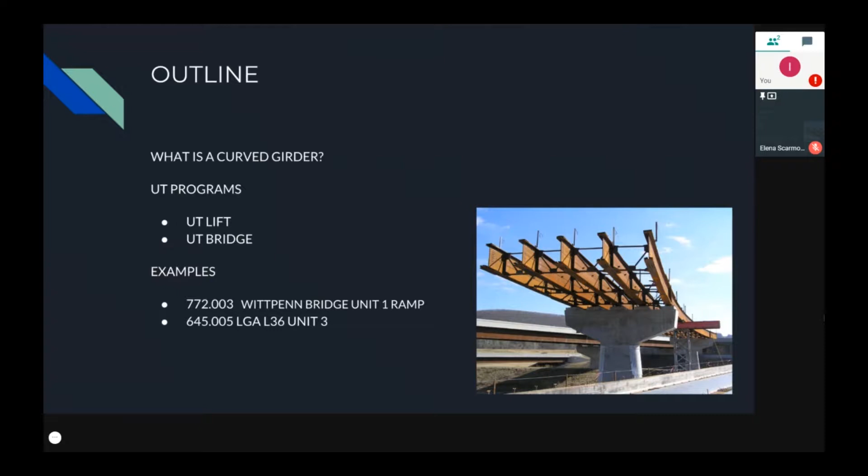First, what is a curved girder? So, the NHI specs consider when you have a central angle of your girder less than 3 degrees, you don't have to consider it curved, which is helpful because there's a lot of extra work that goes into analyzing curved girders. There's also an AASHTO spec that considers it 0.06 radians, which is a little more than 3 degrees, so you have a little more wiggle room.

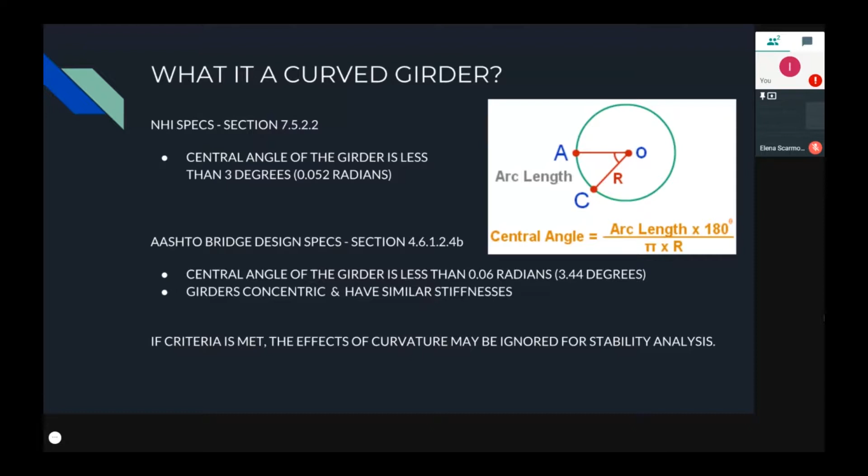But the central angle of your girder is the arc length of your girder divided by your radius. So normally you have to have a very large radius in order for it to be considered a straight girder, and I haven't come across this in any of the curved girder jobs I've done, but I think other people have at Siefert. So if you meet this criteria of being less than 3 degrees, you don't have to consider its curvature, and you can analyze it as a straight girder as you normally would.

So how do curved girders behave differently? Their center of gravity is on the inside of the curve, which is something you don't have when you're analyzing straight girders. This can cause tricky rigging situations, and you really need to look at different spreader bar lengths and different rigging options when you're looking at curved girders. Here's an example of a curved girder being set with a crane. This is the Glacier Skywalk in Jasper National Park, Canada.

I almost went to this on vacation, but it was very rainy and snowy the day we were going to go, and we didn't end up going. But found some pictures online.

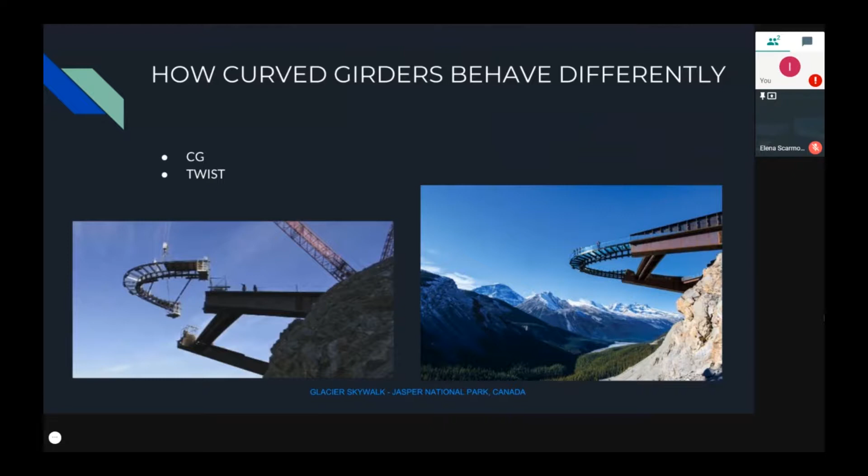Another aspect you want to look at is twist of your girder. So this is what can happen when you have curved girders and you pick them up. They can twist a lot. The twist is caused by the center of gravity being inside your radius of curvature and your pick locations not in an ideal location.

Your girder can be considered stable while still rotating, so it's something that we really need to look at when we're giving our packages to the clients, that they're not just stable and they have a minimal twist. So when you're making your girder connections to splice plates, they're easier to make if they have less twist.

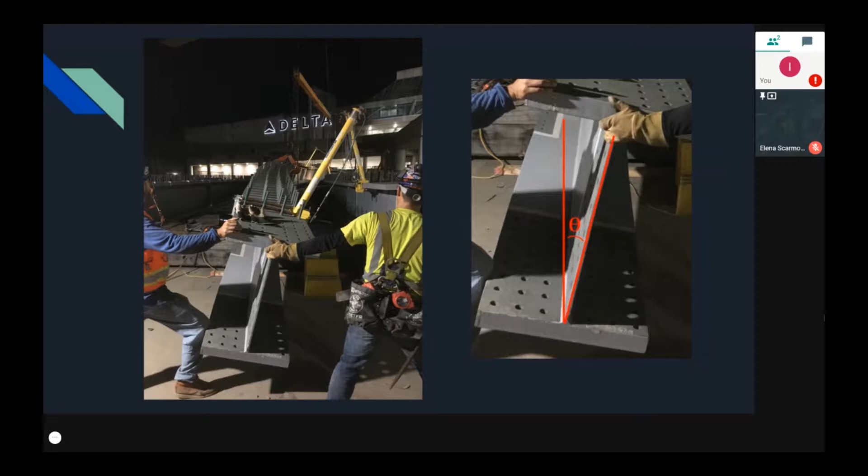So one of the UT programs we use to look at curved girders is UT Lift. UT stands for the University of Texas, which is where it was made, and it is an Excel template that looks at curved girders on the hook. It's a very handy program, and it's very user-friendly, and it has a lot of different functions. It can tell you the center of gravity of your girder, which is nice. It gives you your ideal lift location.

The image in the top right corner shows your ideal lift locations where your line of support runs through your center of gravity. This is nice because you have zero twist in your girder when your line of support runs through your pick points. And your reactions will be equal at both pick points. The image in the bottom right corner shows when you can use any length spreader bar in UT Lift. So when you use any length spreader bar, your center of gravity might not be located at the line of support, and you'll have an eccentricity, and this is where you get your twist from in your girder.

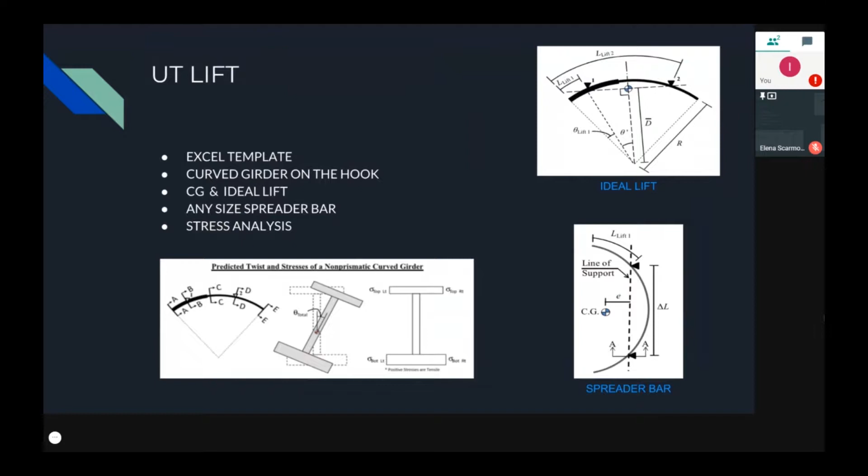UT Lift lets you put in any size spreader bar you want, and you can look at the different stresses along your girder and your twist. UT Lift looks at stresses in the top flange, right side and left side, and stresses in the bottom flange, right side and left side, at several points along your girder. The bottom image on the screen shows it taking 5 sections: at the beginning of the girder, at your first pick point, in the middle of your girder, at your second pick point, and at the end of your girder. So it looks at stresses throughout the girder, not just in one location. I'm going to pull up an example of a UT program.

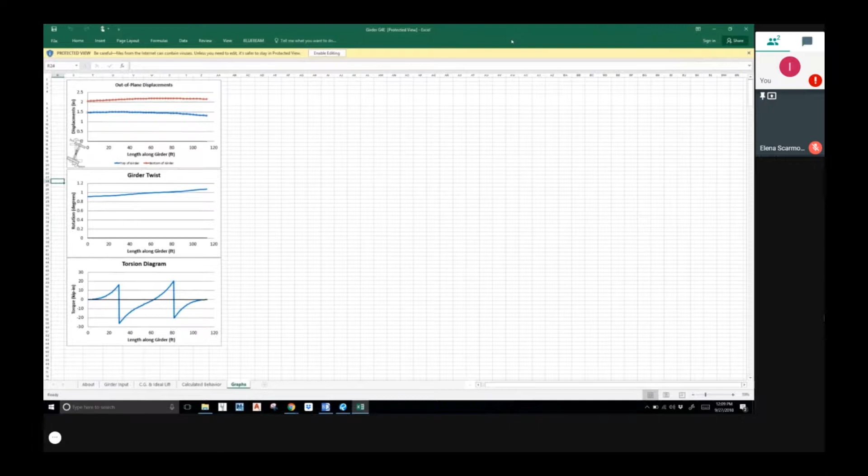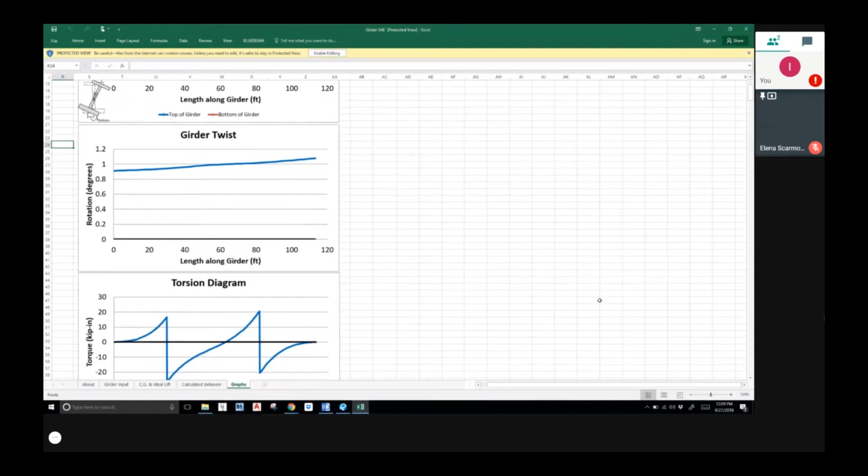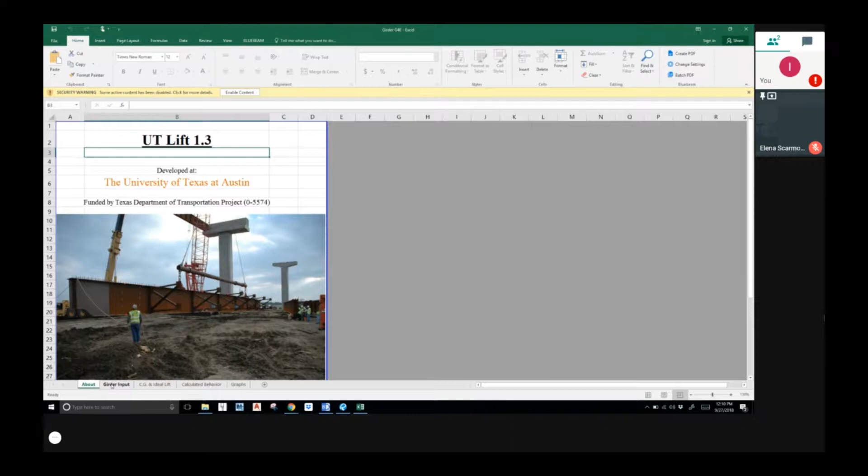So this is UT Lift. Whenever you open the program, you have to click on the icon that says Enable Editing to allow the program to run different stresses when you change the input. So this is the cover page. The University of Texas created the UT Lift program. This is version 1.3. They're always coming out with new versions and updates to it, which is very helpful, and you can find information online about it.

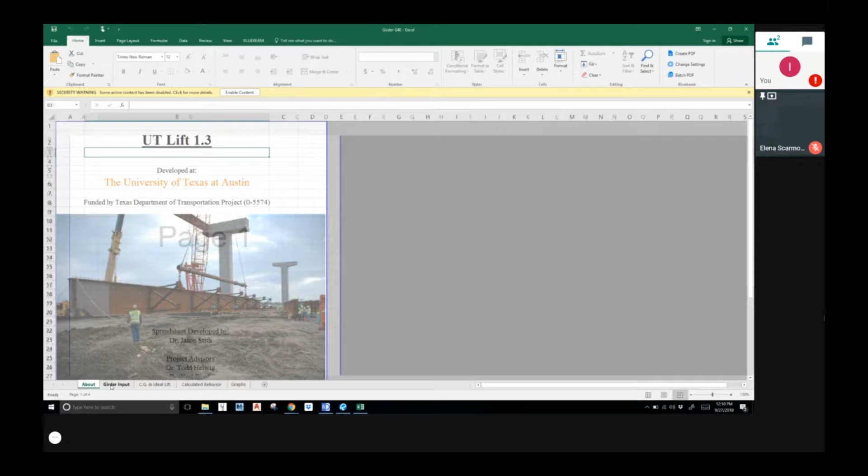Your first page is your input page. It's pretty straightforward, where all of your green boxes are your inputs and all of your blue boxes are your results. So title it, project name. This example is Unit 1 from the Whippin Bridge that I worked on with Kevin. I was looking at girder G4E.

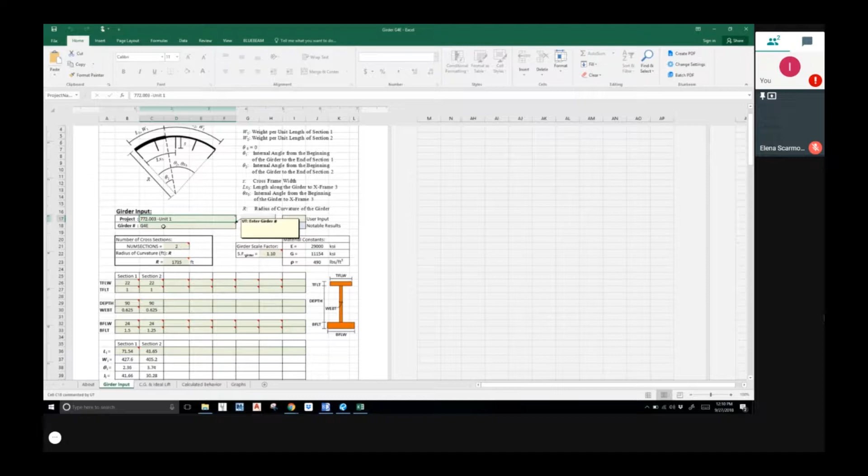You can input how many sections along your girder you have. So this is helpful when your girder is changing cross sections along it, or if you have 2 spliced girders that have different cross sections, different plate thicknesses, you can take that into account in UT Lift. So you input your section properties, top flange, your web, bottom flange, your length along each section, and your radius here.

On the bottom of the Input tab, you have your cross frame setup. UT Lift does a nice job of explaining all of its inputs. If you hover over the box, it'll tell you what you should enter. And it has a nice diagram on the bottom of your cross frame location. So this is the length along your curve to cross frame number 1. And your distance S is the length of the cross frame.

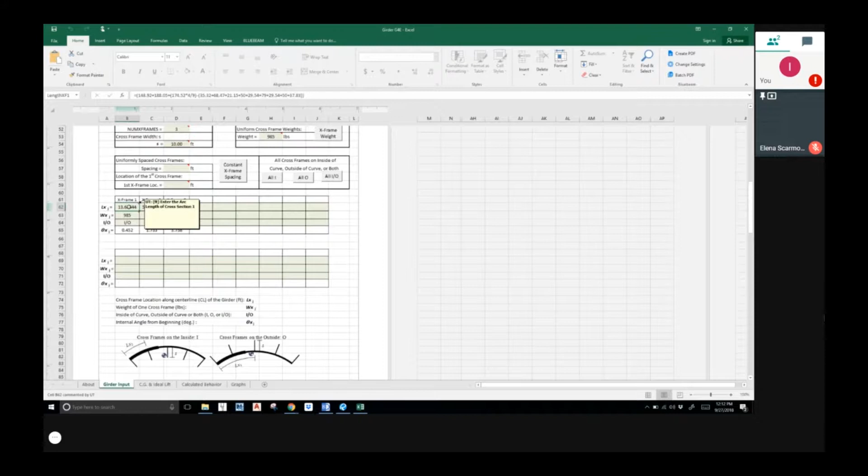So you can put cross frames on the inside of your curvature, the outside of your curvature, or both the inside and the outside, which is typically what we see when we're doing rigging and calling out our diagrams. So to input them, you can use the constant buttons up top if everything is spaced evenly and the same weight, where you can put in one weight and hit constant cross frame weight for all of them. If you have, let's say, 5 cross frames, it will pop out all of your same weights down here.

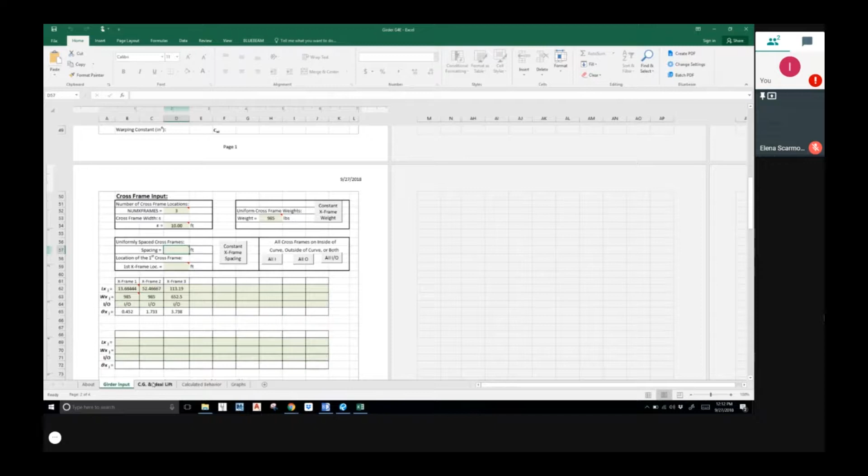And then you can choose your spacing, set it at 10 feet, and hit constant cross frame spacing, and it will automatically put in your length for you. In this case, I had different spacing in between my cross frames, so I did it manually. So after you've inputted all of your section properties and your cross frames, you can look at your outputs.

So the first output tab is your center of gravity and your ideal lift point. It tells me my total length and weight at the top, and then my distance along the curve to the center of gravity. It also gives me the offset, which is the distance from the center of gravity to the center line of the girder.

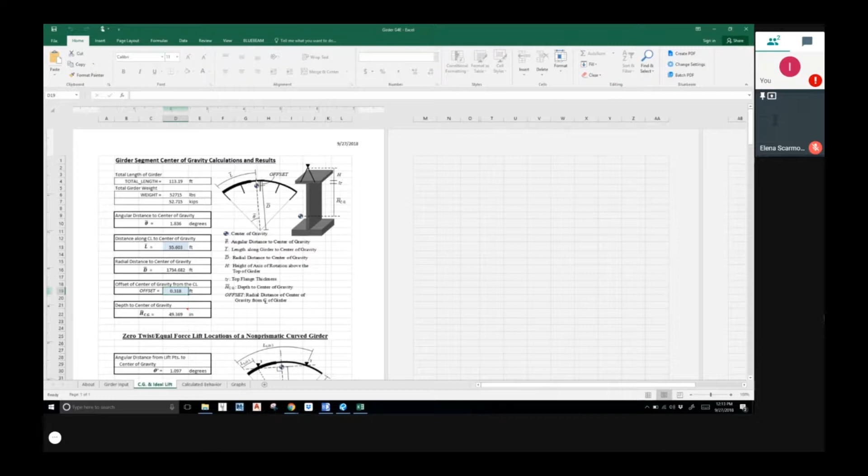On the bottom, it gives you your ideal lift points. So this is what we would use if we had a spreader bar length that you can make any size, and you want to lift your girder with no twist, which is the ideal way to lift a curved girder. Then you would use an 88.8 foot, a 66.4 foot spreader bar, and it gives you your location along the curve to your lift point 1 and your spreader bar length.

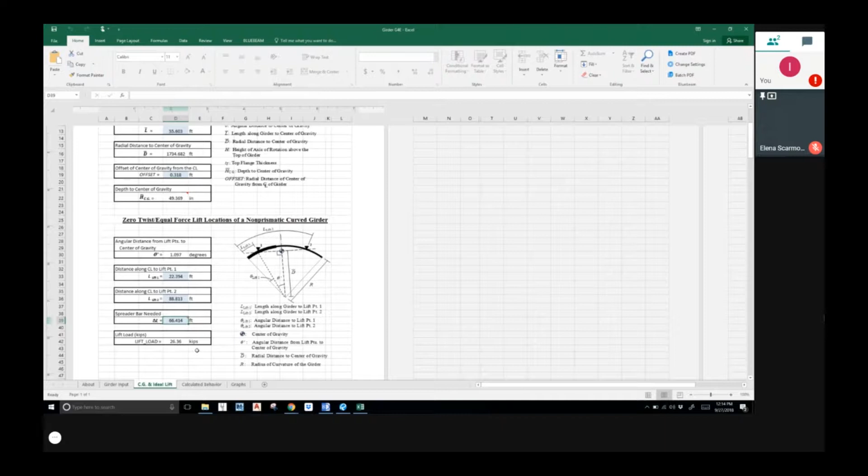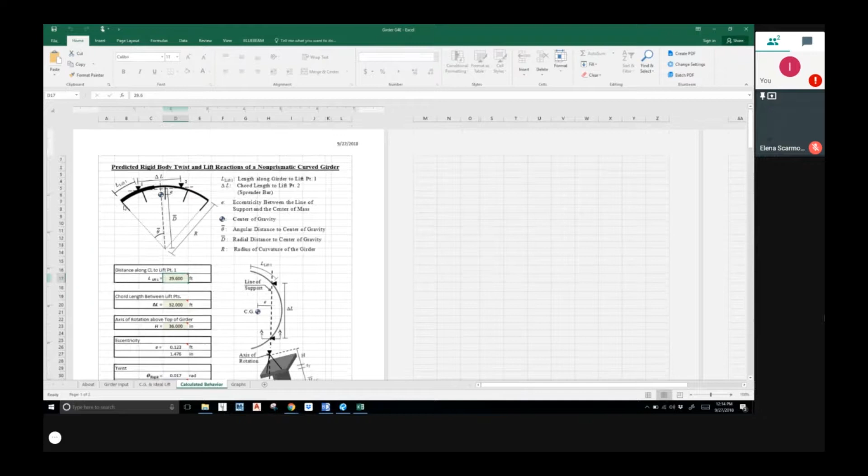So in this case, we were using a specific length spreader bar. We can't use a 66-foot spreader bar. We go to the next tab. Up top, you can input your location along the curve to your first lifting point, and then your spreader bar length.

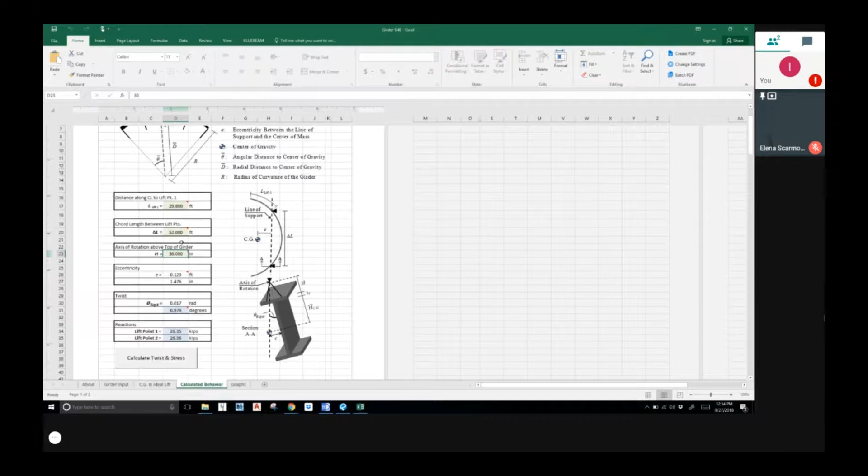The height H is the axis of rotation. We were using the height of the beam clamps because it's the height off of the girder to where our shackles are located, where it's rotating. After you input your spreader bar length and your length to lift point 1, you can calculate your twist and stress. This notification will come up that will tell you that you're about to analyze your girder. It takes a moment, your analysis has ended, and now we can look at our results.

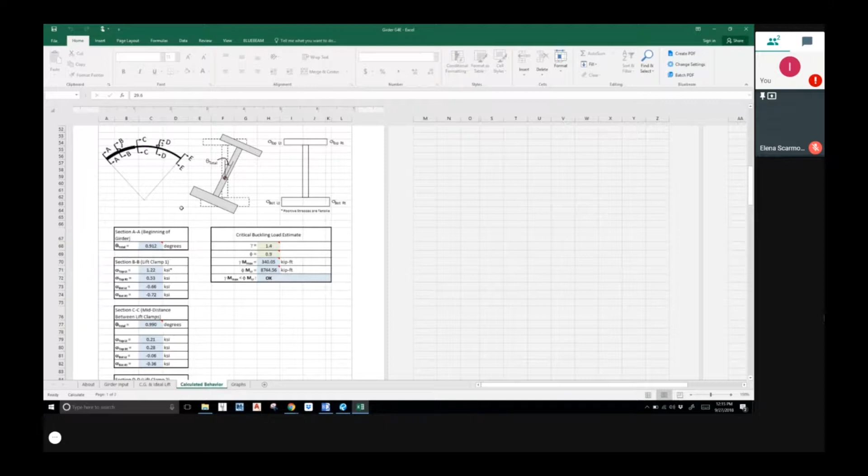So here's our twist and stresses based on the locations along our girder that I described earlier: at the end, first lift point, at the center, second lift point, and at the other end. It gives you your rotation in degrees, and it gives you stress at the top flange left side, top flange right side, bottom flange left side, bottom flange right side.

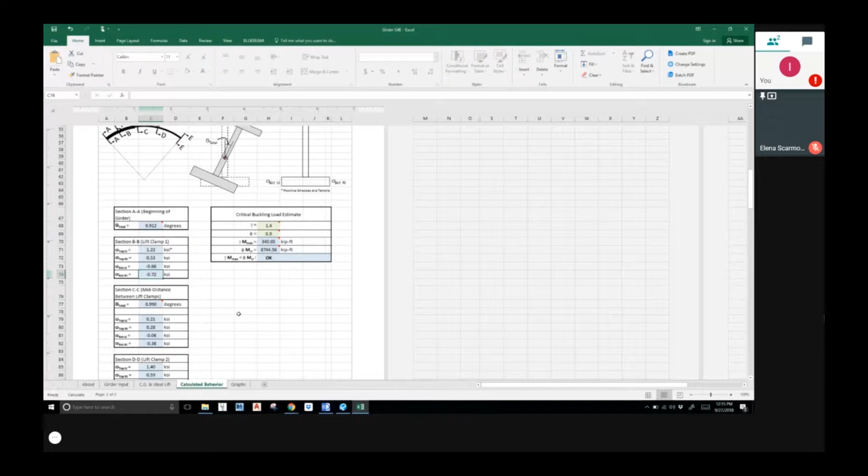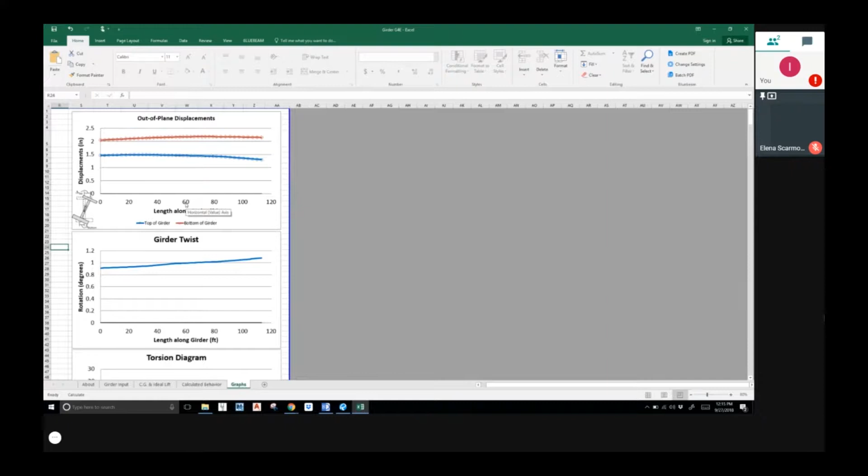The other tab that UT Lift shows is your graph of your displacement, twist, and torsion. These are just nice to see how our girder is changing along the length of it. So after we run our UT Lift program, we get our stresses, we take our max stress, and we use it to check our girder stability.

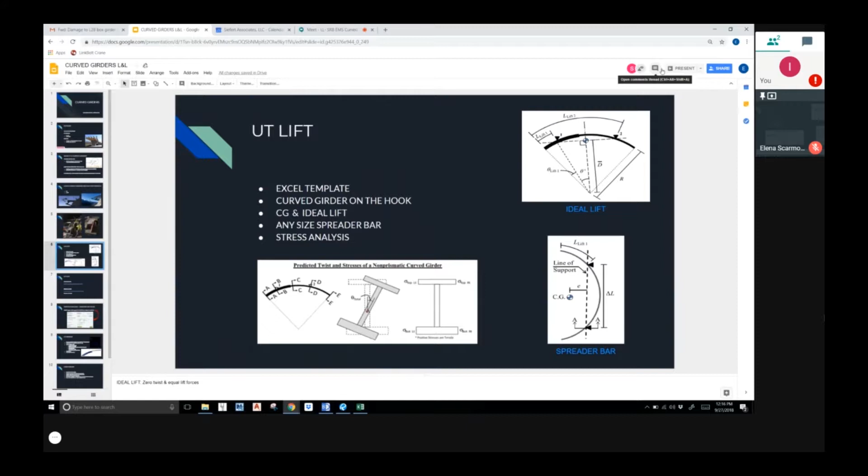So the red box is where we put in our stresses, and then we check it using critical buckling stress equations from the AASHTO standard specification, blue pages.

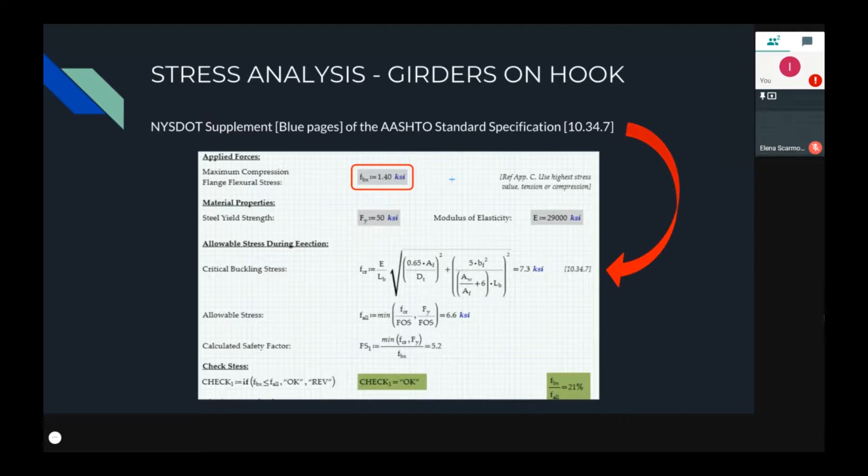So UT-Lift is a very handy tool, very user-friendly, easy to use, and it's located online. It's available to anyone, free to download, and I also saved it on a server in the following location.

Any questions for Shara? Yeah, I have one. Good. I have a question, Fadi. Go ahead. How come you guys don't use, I saw there's like a critical moment that kicks out of that UT Lift sheet?

So I was reading through the NHI manual, and it goes over how that critical moment is used as if it was a straight girder. So it's not completely accurate, and I know that the UT Lift program can be used for straight girders. You just input your radius as 0, and you can use every other function of it the same way, where you can get your ideal lifting points based on, like, if you have cross frames in a different location that are going to offset your center of gravity. But that is for straight girder analysis. And I don't know why it's not clearly stated in the UT Lift program, but I was reading that in the NHI manual. So that's why we checked the stress using the other critical buckling stress equation.

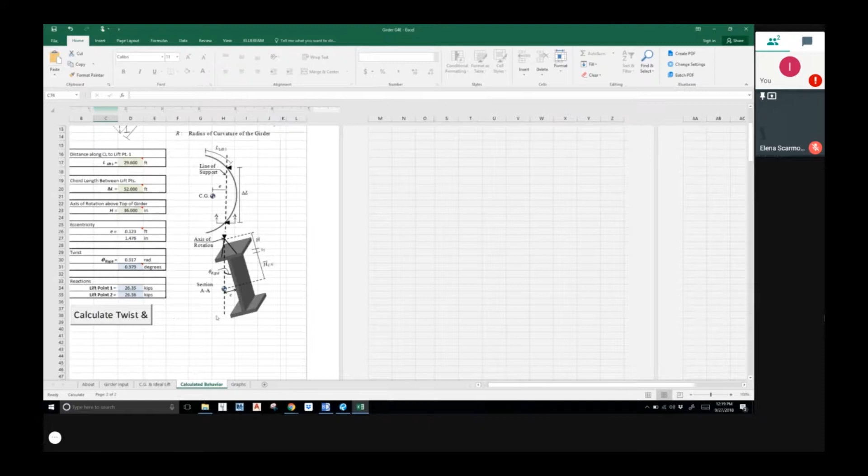So if you're picking with one crane and you have a spreader bar or just swings, you want your reactions to be equal. So you have a certain length spreader bar and you're changing your lift location number 1 until your reactions, which are given here, are equivalent, because you want to lift equal weight on each swing. So this is for if you're lifting with spreader bar or swings. If you're lifting with 2 cranes, you can have your reactions unequal and it will still run. It will just give you a notification.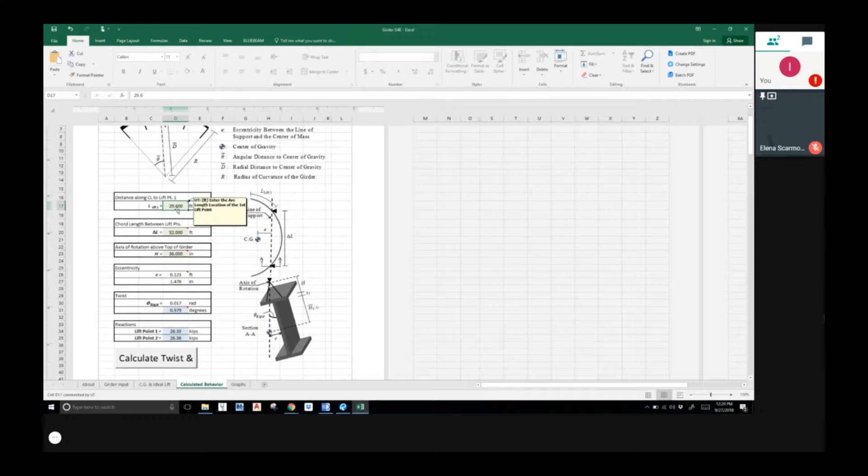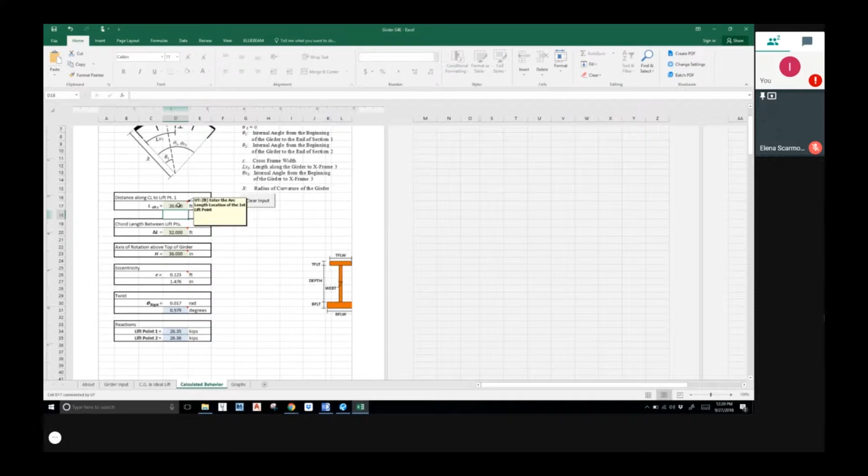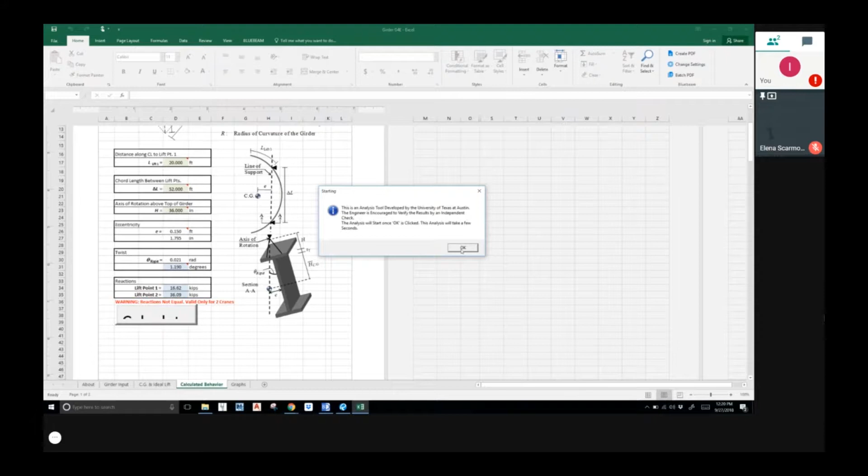So if I change my lift point 1, it gives you a warning, reactions that are not equal, valid only for 2 cranes. This is if you're doing a 2 crane pick, and then you can still calculate your twist. And then it will give you your different stresses below. Does that cover it? Okay.

Any other questions?

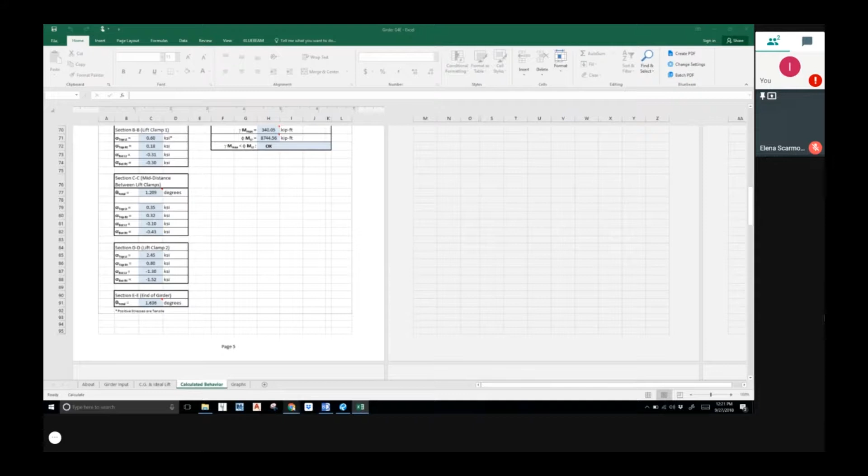Analyze your girder on the hook with UT Lift. You have to check that it's stable in its preferred position. So for this, we use UT Bridge. This is 3D analysis software by University of Texas Austin, and it's designed with construction in mind. And what that means is it's not meant for permanent design, it's meant for analyzing structures in several stages. So it's designed for exactly how we're using it.

There's a lot of capabilities in UT Bridge. I haven't used all of them, but just to list some, you can model plate girders or tub girders. I haven't gone into the analysis of tub girders, but you can model straight or curved girders. And then you can perform an erection analysis or a deck placement analysis. You can add a holding crane or temporary towers, and with the holding crane, you can input your holding crane reactions. And then you can add fixities, and because this is a 3D analysis software, you can add the fixity as one of 9 points along the cross-section.

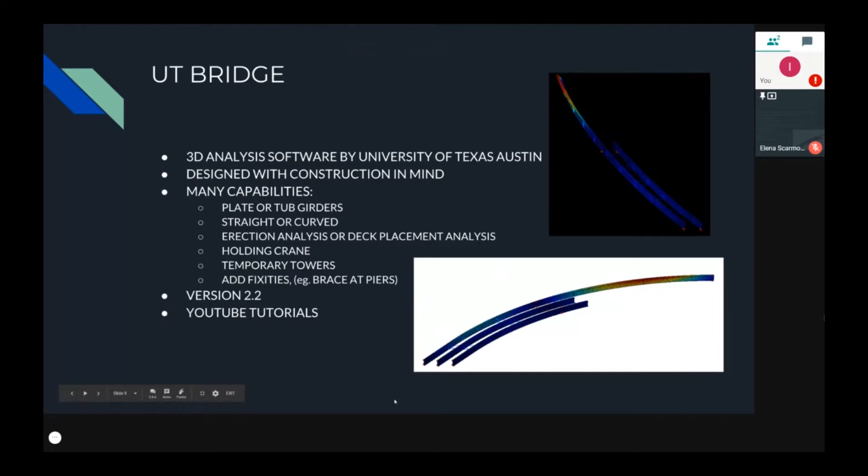Online on YouTube, the UT Bridge makers have a series of tutorials you can use, I think like 10 of them. We're going to go through how to use UT Bridge.

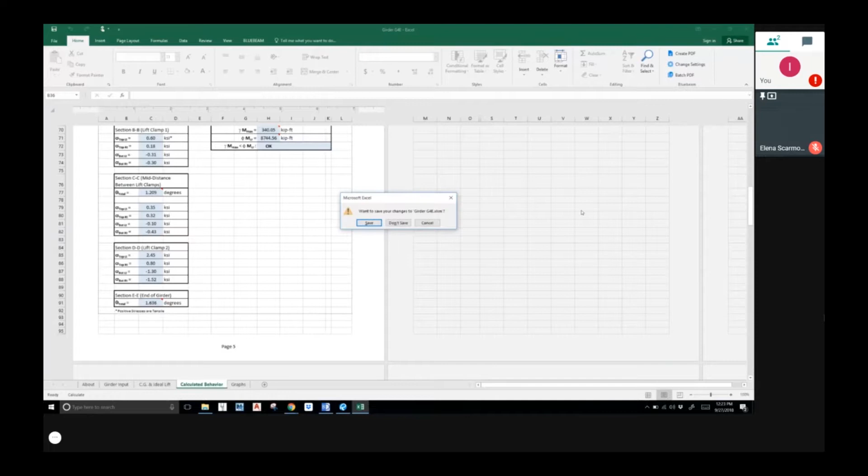If you open UT Bridge, right away you can select plate girder or tub girders. You can start a new model or open an existing model. Something important to note is that you can't go into the file folder and open it straight from the file. You have to go into UT Bridge and open up a file.

To start a new model, the first thing that's going to pop up is your features, and this is project specific. So if you have a curved bridge, you can select seat supports, multiple girders, bridge supports, splices, stiffeners. You can add cross frames or K-frames, and temporary supports. Then you have to select either erection analysis or placement analysis, otherwise it's going to give you an error.

You can have an eigenvalue buckling analysis, point loads, special degrees of freedom. There are a couple other capabilities here that I haven't looked into. You can add thermal loads, and you can add a top flange uniform load.

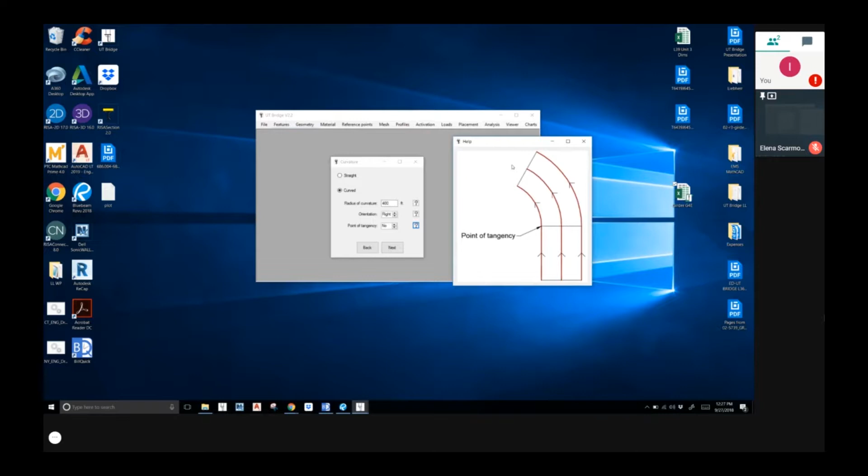Then there's point of tangency - if your girder is straight, and at some point along the girder it will start to curve. We have one of these set of girders on the LaGuardia project, and this is useful. You can input a point of tangency for each individual girder, or you can make it uniform.

Then you're going to put in your girder length. No matter how you orient your girder, girder 1 is always going to be on the left-hand side. So like in the tutorial, it had a left orientating curvature, and in UT Bridge, girder 1 is that interior girder. So even if your bridge curves right and you put in the radius of that smallest one, that's not girder 1 - girder 1 is always going to be on the left.

Make some girders 150 long. If you have all uniform girders, you can just put in the length of the first one and then click uniform, and it'll automatically populate.

So spacing - this is how UT Bridge comes up with the radius of the other girders. Unfortunately you can't put in varying spacing, but for LaGuardia we just used an average spacing.

Steel properties - it automatically has them, but if for some reason you want to change them, you can change them here.

So supports, pretty self-explanatory - you're going to put in the location of the supports on all the girders. If you look down here, you'll have two tabs: the first for your first girder, and the second for your second girder. So put in a support at 75, make girders uniform, and it will change that second tab. Then you're going to input the support type: 1 is for a fixed support, and 0 is for an expansion bearing. If you forget that, you can put in the question mark for help.

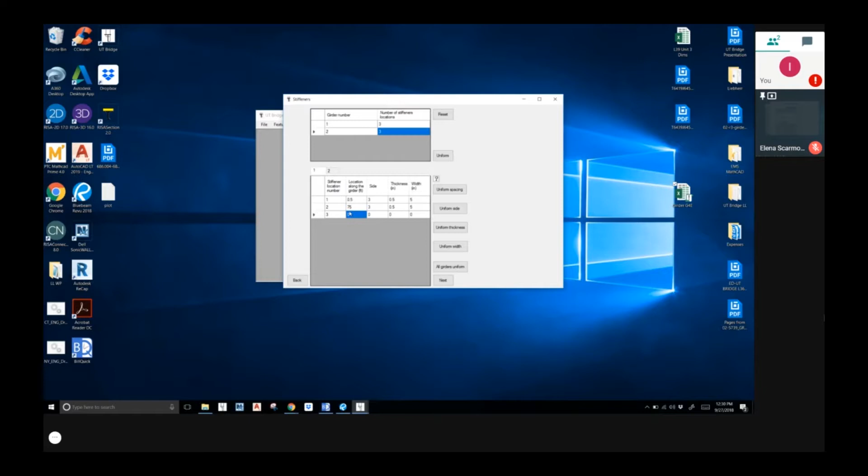And then the side, so you can choose to put it on the left-hand side of the girder, the right-hand side of the girder, or both. The 3 is both sides of the girder. So for this, just remember how you orientated it, what's left and what's right. And then you can click uniform side. It will apply to all 3: uniform thickness, uniform width, and all girders uniform.

So next is you're going to input your cross frames, number of cross frames, we'll make it 3. So if I were to make this, let's say left girder location, if I were to make it 0.6.

If you try to click next, it won't recognize it, that even if it's just like 0.1 off, or it doesn't matter how many decimal points, it won't recognize that it's the same location. You'll be able to continue, but when you go to run the model, it won't be able to run.

And sometimes also this is a problem with UT Bridge: if you go back, it'll delete all your information. So I just put all that information in, and if there's a problem with it, I think most of the time that's why it deletes it.

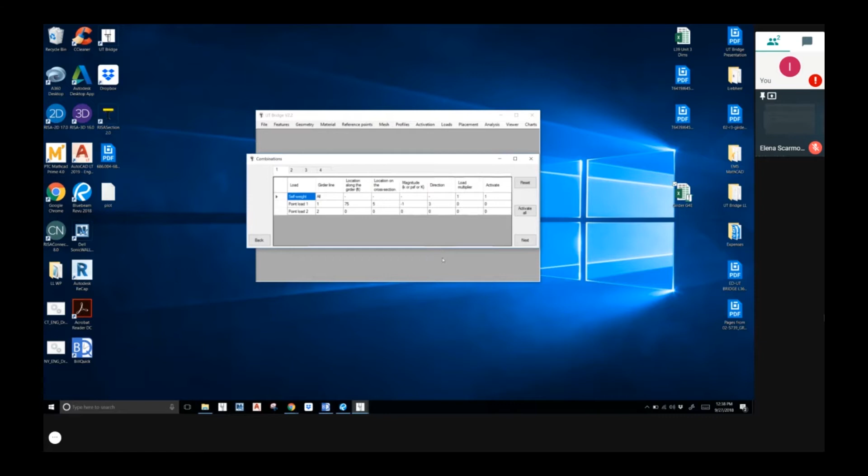So Z is up and down, X is, I guess, perpendicular to the member, and Y is along the length of the member. You put in your magnitude and direction. Here you have your combinations for each step. So in step 1, you can put in your load multipliers, and you can activate the weight or the point load in each specific step.

This is where you have a temporary support, or if you have cross frames, you actually have to go back because it somehow always skips the question to tell the model when to activate your cross frames. But if you go past it and then go back, it'll pop up.

So you click it and then you click run, and you have to save it first. Save it. Okay, well, there was an error, but it'll run, and it'll run for quite a while, so I'm not going to make you sit through that. I'm just going to open a model that I already ran.

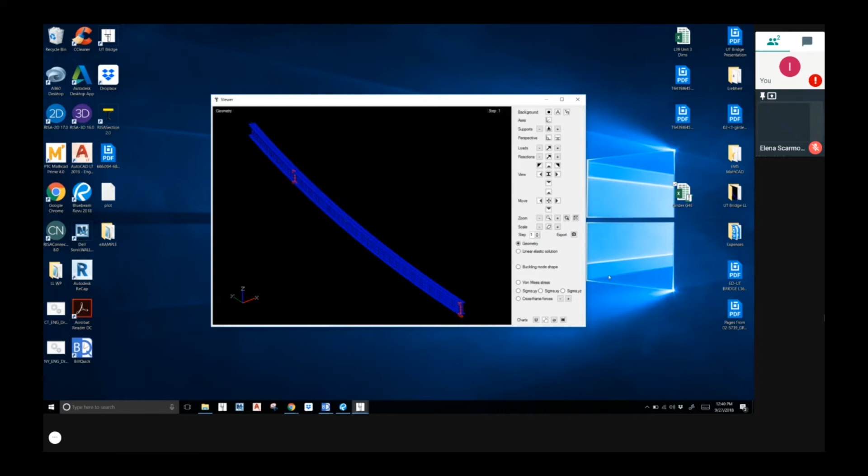So this is what's going to pop up. So this is your first girder, so this is going to be step one. Change the view over here. So this is just your basic geometry. Over here, it's not really easy to zoom in, but you have your reaction, your vertical reaction, your horizontal reaction, and then up here is where we put that temporary brace, and then it'll show you all your stiffener plates.

Here and here are your point loads, and right here is where your holding crane is. The point loads are splices, the extra weight from the splices. You can switch to your linear elastic solution, and this will give you your displacement. Up here, it'll show you your max displacement. You can scale this if you really want to. You can see your buckling mode shape, and then it'll give you your von Mises stress.

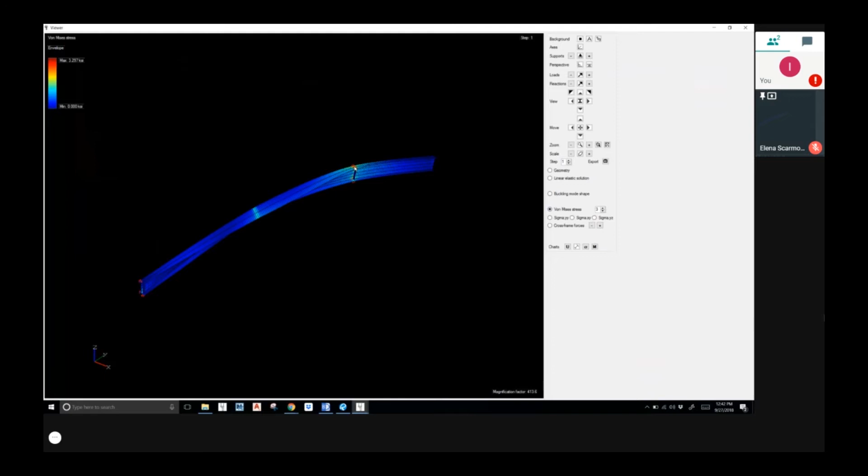And a lot of times, such as this, your stress is going to be localized over where the brace is. So you can go over here and you can see your stress chart, and it'll give you the stress along the member. So each of these dots is the average stress along each one of those mesh segments. So it's the average along the 18 inches, which is why you don't see this maximum stress, because that's just a point load, and the average over those 18 inches isn't that high.

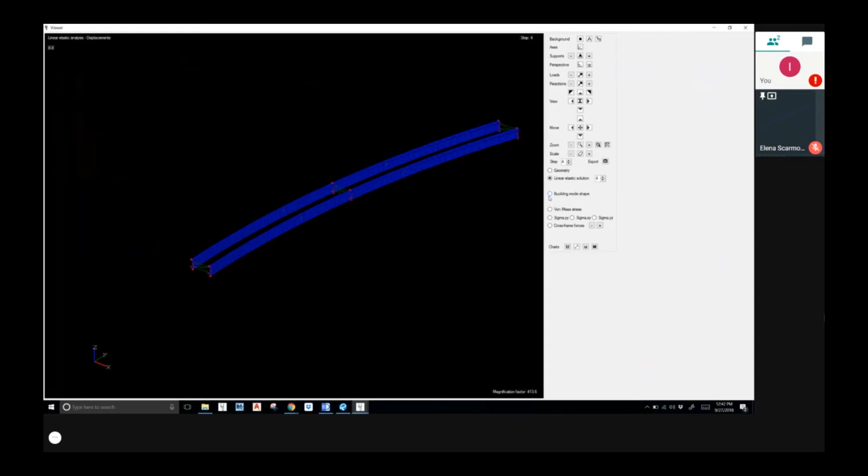Then you can go back to geometry. You can switch and you can see step 2, step 3, step 4, and then you can go through the same diagrams for each one. Then you can see your moment, your stresses. This is moment and shear. This is showing step 1, so you keep having to click refresh every time. So it'll give you the moments for both girders on the same diagram, and then your shear.

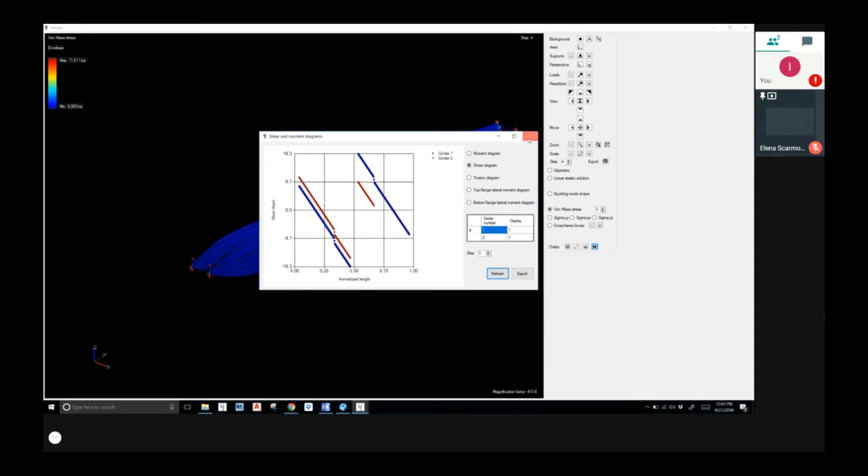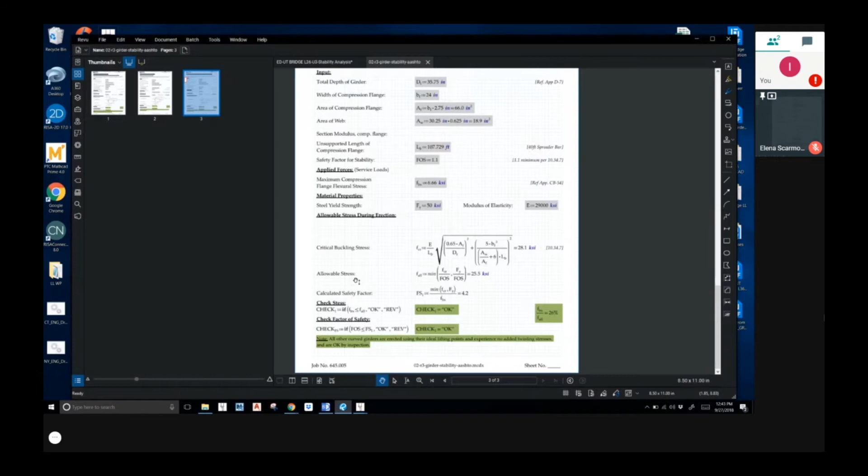So unfortunately, there's no real way to export your inputs. So what we've been sending is we export all the diagrams and we mark them up. It doesn't take that long to make the models, but if you were to model a whole bridge, it would take a lot more time than necessary. So we've just been selecting the couple of cases, the worst case scenarios, and modeling those.

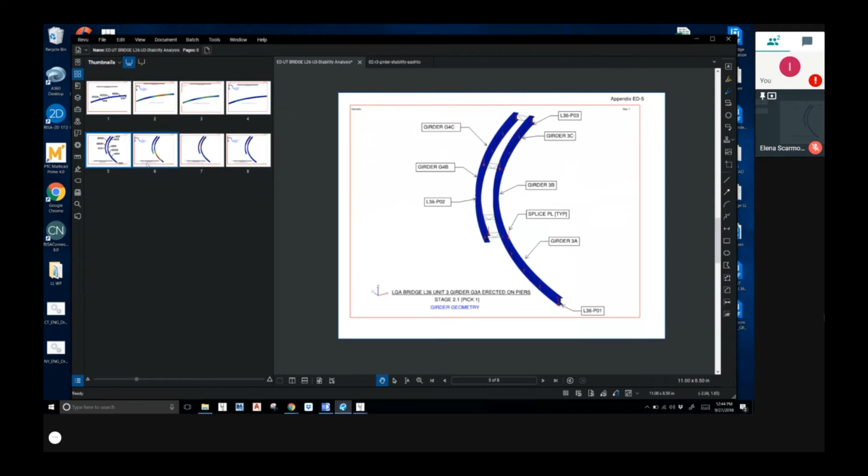Also, the more girders you have, the longer it takes to run, and the smaller mesh size you have, the longer it takes to run. Some of the models were taking well over 20 minutes just to run and go through. So you don't always have that time. You use this a lot too?

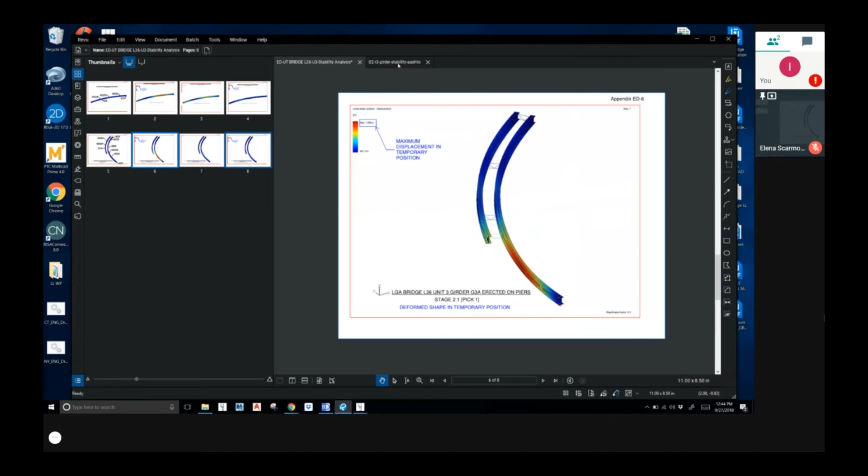So here we've been using this max stress if it's along the member. If it's local, we attach the member stress diagram, and we show them it's just a local stress. The maximum has to show in the diagram. And then, much like we did for UT Lift, we used the AASHTO stability analysis from the blue pages, and we just checked the max stress against the critical buckling stress for the factor of safety.

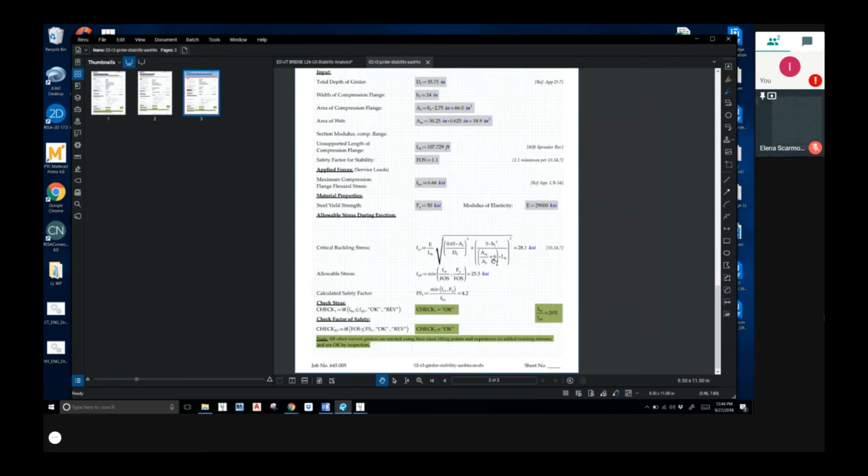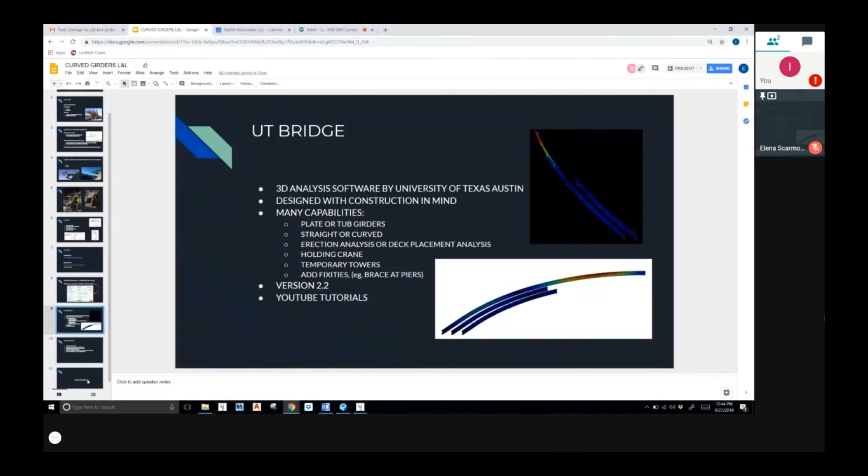Just to go over some user issues that I encountered. I mentioned some of them, but one is that you can't really add to a model. Every time you try and add another girder, you have to re-input all that data. So that's another reason it's really helpful to just save all your input into an Excel file. It's really easy, you just copy and paste. And sometimes the program will crash and you won't be able to open an existing model. So if you save all your input data in an Excel file, it takes 5 minutes just to re-input it.

The cross-frame and stiffener plate locations have to be the exact same. You have to reassign your mesh size and section properties every time you change something. And the order of erection sequence takes a little while to figure out, and then when you export the image, they'll delete from the folder, and a smaller mesh size will take longer to run. Any questions?

Did you guys? Okay, if you can't, you're exporting the input every time you do it. So if you're reviewing it, what are you reviewing? Are you reviewing the exported input file? But how do you know the model was actually run off of that? Yeah, that's a great question. So you cannot review inputs, you cannot review outputs. You have to run the program. You just rerun it. Actually, Sierra does it, I don't do it. So we make sure the radius is fine, the splices, the sequence, you can tell from the output. And if we see where the holding crane is, you have to rerun it. That's the only way to check it.